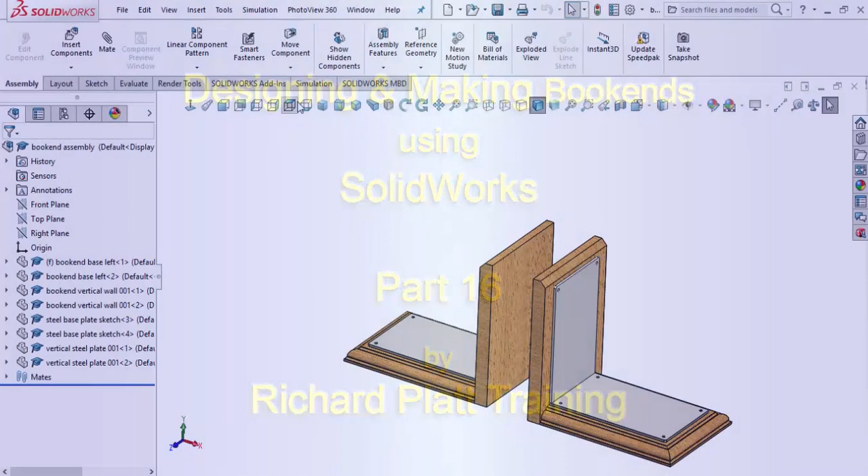As you design in SolidWorks, a couple things happen. You start opening up a lot of files. I'm going to go ahead and save the bookend assembly file. As you can see by that asterisk, it tells me it needs to be saved.

I'm going to save that file, hit my save icon up here at the top, and go back and look at some of these other things like the vertical steel plate and steel base sketch. I'll go ahead and close those out, come up to my window, see the vertical steel plate there, and close that out. You can actually manage your files, turning them on and off, opening and closing them, using that window.

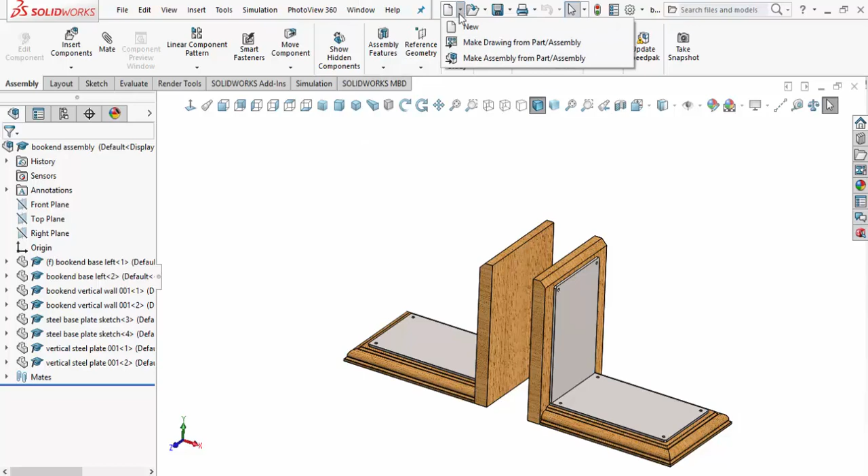Let's go ahead and create a new file, new part, and this time we're going to create the parts for our letters. So I'll go ahead and hit OK on that, and we'll bring that up.

In this case here, I'm going to go ahead and set it to plain white, because you know how I feel about that. We'll come down and make sure our units are set correctly. I'll hit Edit Part - oh excuse me, we'll do that. We'll set the custom here, and it says it's set to millimeter gram second.

Well, we got to fix that. So it'll come up here when I edit the units, and it'll let me correct that. Let me double check that. Select this - Edit Document Units. Now I can change it down there by that pop-up, or I can automatically go up here and select it there. Again, I'll set myself to 4 decimal places.

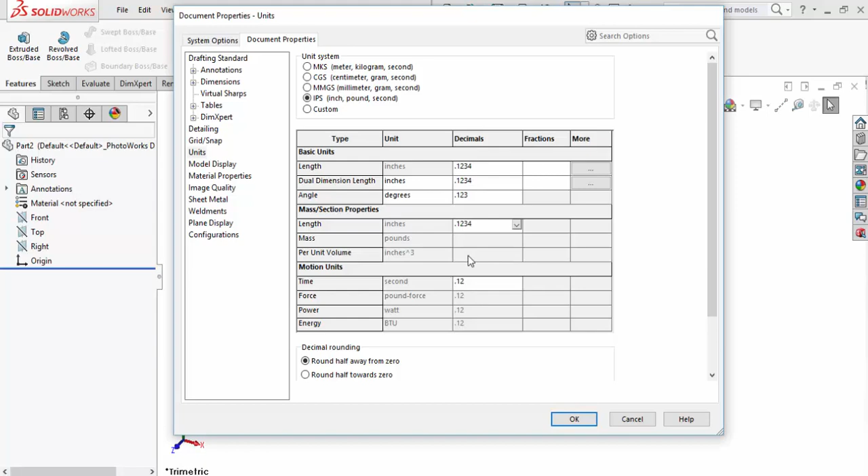As you can see here, I like 3 on the angle readout. Whoops, set that back to 3. And I like 4 on the length. So I'll go ahead and hit OK on that.

So now I'm just going to pick one of the vertical views here. Let's go with front for right now, and we'll set ourselves normal to that. And we will come over here to Sketch. And here in Sketch, you can see where it says text. So we'll select text, and it'll come up.

I'm just going to write the letter R, making sure I've got it capitalized. Now I can come down here to where it says different sizes, or I can use font. So I'm going to select, take that check off where it says document font, which is the default font that comes with SolidWorks, and I'm going to select font.

It's going to go ahead and open up this library here, and it shows me the fonts that I currently have loaded in my font library. So you can see here's college, and you can see the different size previews of that right there. I'll go to oblique, and there's bold, there's oblique there, semi-condensed, there's condensed, and I think you can scroll down here and get some of the semi-bolds, that kind of stuff, semi-condensed. It actually has quite a few based on that font.

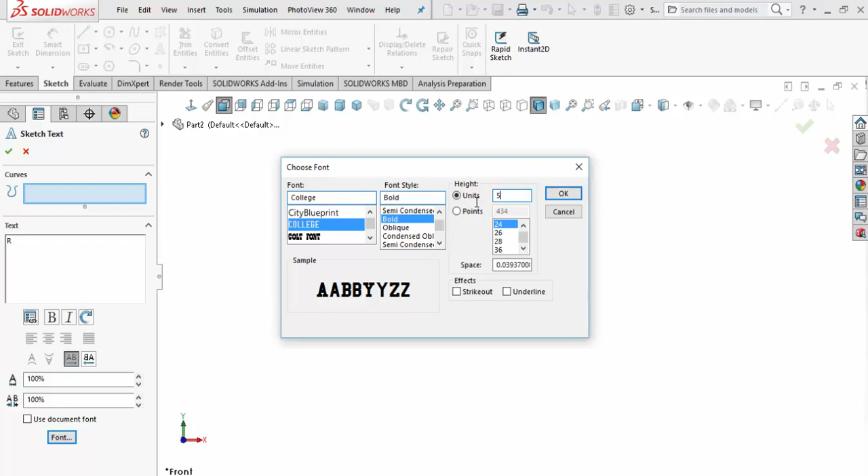So what I'm going to do is probably just come back up here to bold, and I'm going to set it to units. Now when I set it to units this time, I'm going to go ahead and give it a size of 5 inches. So that's my units. I'll go ahead and hit OK, and there it places the R, as you can see right here. Well, it's kind of cool.

So at this given time, I can come back here and hit the rebuild button, and I can look at this sketch, and I'm going to edit that sketch. Let's see what we can do with this. Let's see if we can modify this. I'll set a dimension here.

It looks like it's still set to a font, but that's okay, we can still play with that. So I'm going to go ahead and do a right mouse click, see if there's anything I can change there. It doesn't look like I can.

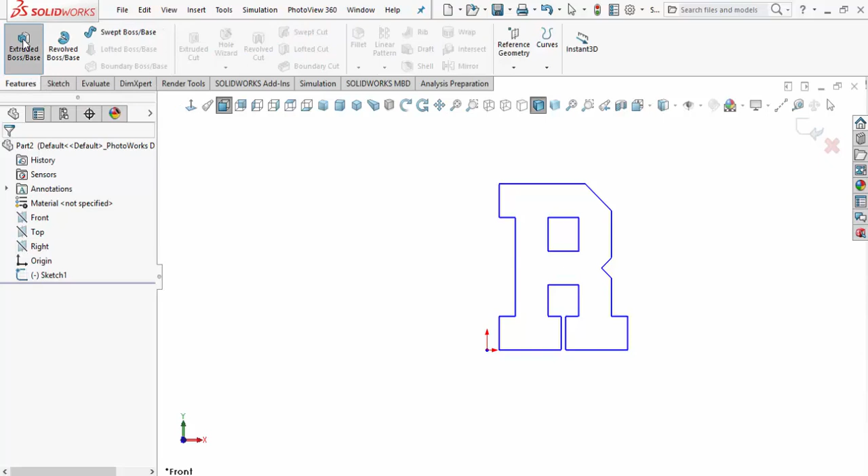And I'm going to go ahead and go to Features, and I'm going to do an extrude. So on the extrude that I'm going to do, again, it's set to 1/4 of an inch. So we are working with 1/4 inch plate steel. So I'll go ahead and accept that and extrude that. It doesn't matter which direction, just as long as you're extruding it.

I'll check that off. So as that's extruding, you can see that it's left it as a piece of steel plate there. Well, I'm going to go ahead and come over here to material, and I'm going to change that to plain carbon. And I'm going to come up here to rebuild my document, and I'm going to save this file.

And it's going to come up and ask me where to save it. I'm going to put in my bookend project. I'm going to say letter, that's set up, letter R. And I'll give it a version number, 001. I'll go ahead and save that file.

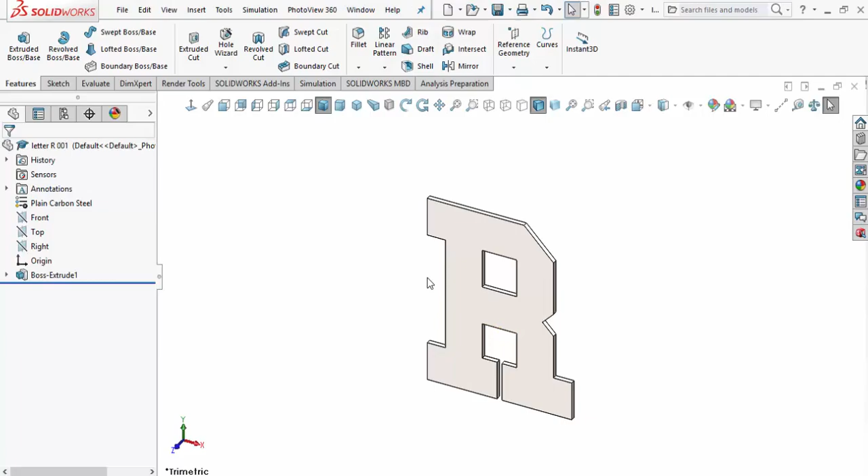So there we've gone and created our letter R. Well, let's stop here for now, and we'll come back.